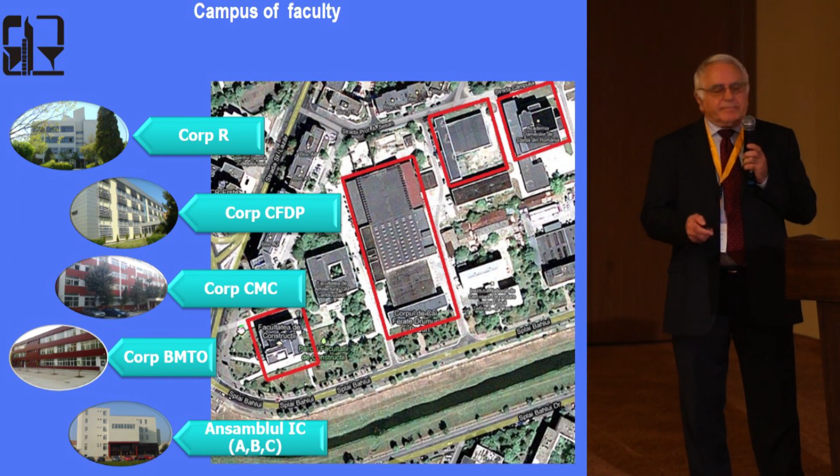It offers 4 undergraduate training programs and 10 Master of Science programs.

We have now 2,500 undergrad students, and you can see a quarter of these are master students, and then PhD students.

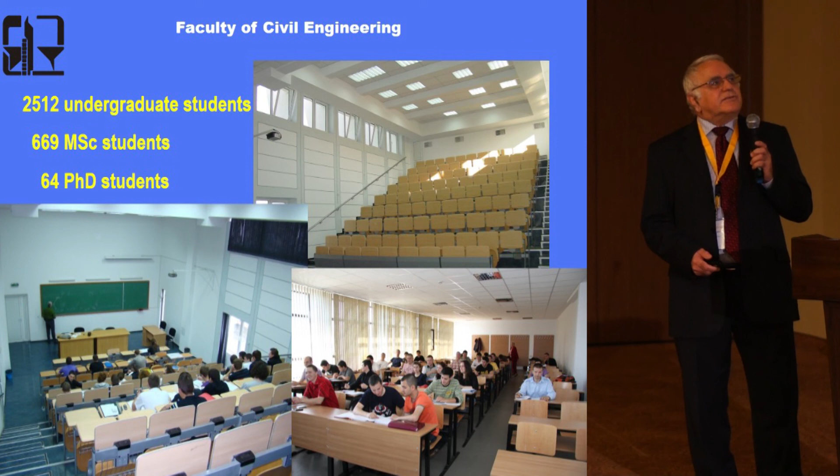To develop any program in civil engineering with good results in experimental work, we have developed a number of new laboratories or upgraded the existing ones.

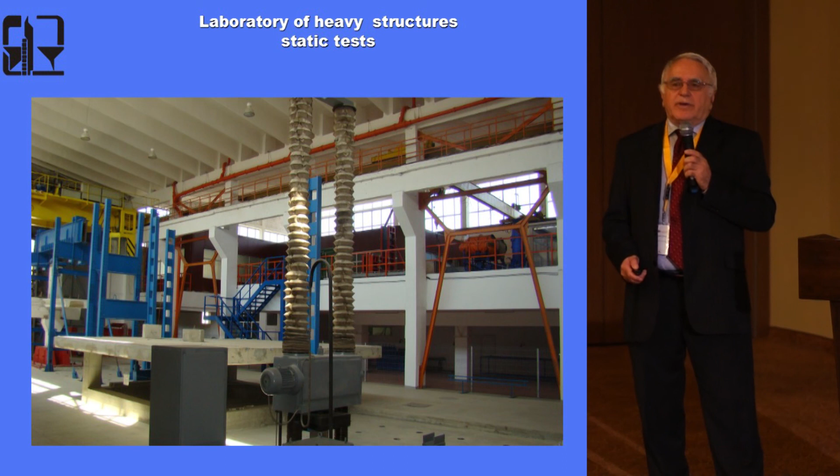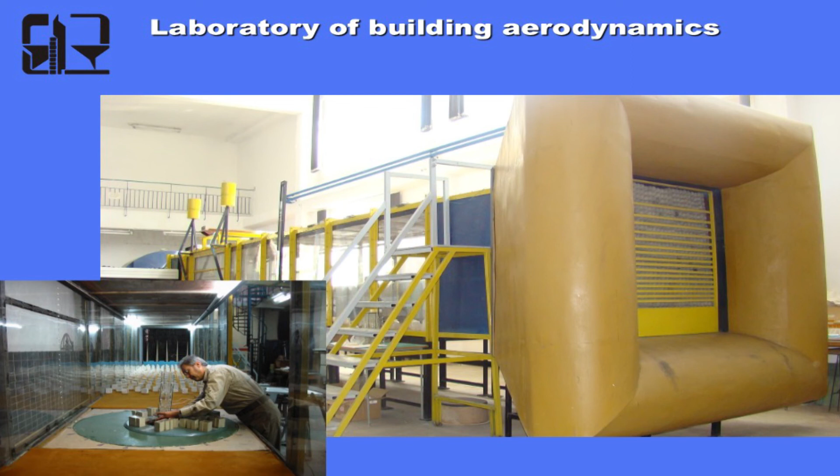There are some unique infrastructure pieces, such as an earthquake research station, an accelerating load station, and then a wind tunnel, and also a laboratory for composites and structural strengthening.

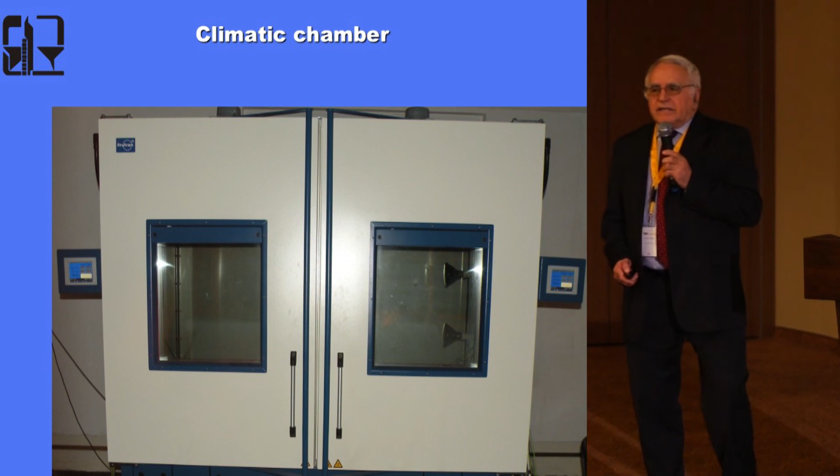We have added lately a climatic chamber to study the phenomenon of heat and mass transfer through the elements. The infrared thermography completes the existing infrastructure for research.

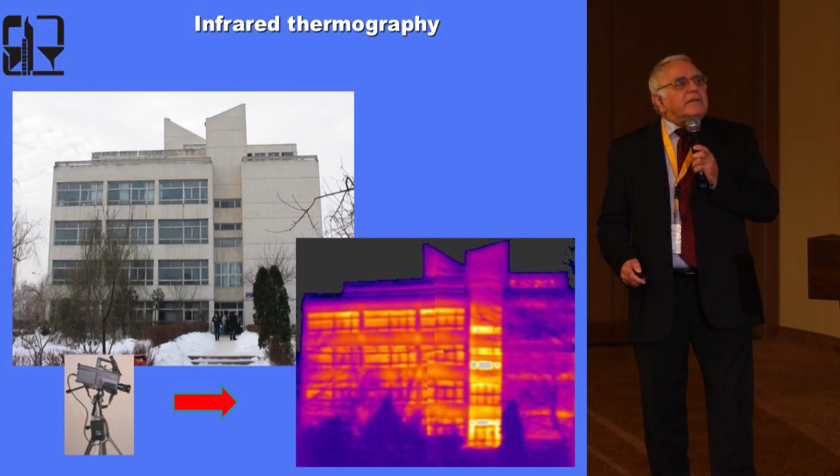The research area—and now, why composites in civil engineering? Why composites, since we have such good traditional materials as steel, concrete, timber, masonry, aluminum, or others like this?

Because there are some issues that cannot be solved solely by the simple materials that we are using.

Don't worry, there is still room enough for all other materials, because composites in civil engineering do not occupy more than 2.5% of the volume of production. 2.5%.

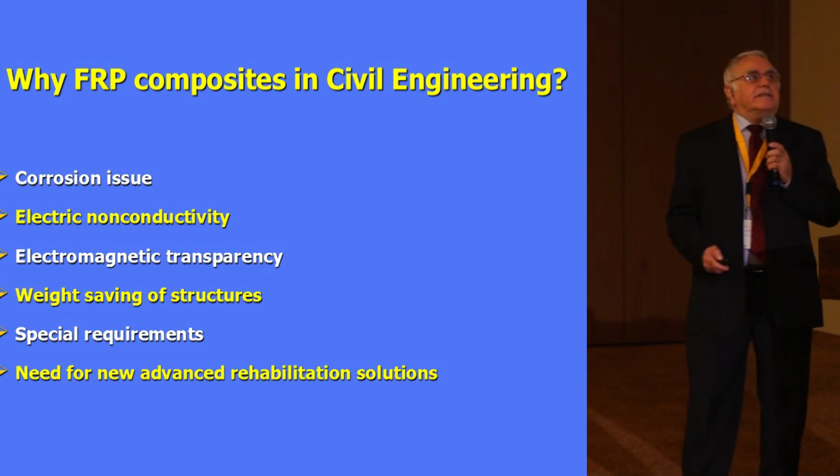Composites are materials or systems made of 2 or more phases separated by an interface, with properties that are better than any of the constituents provide working individually.

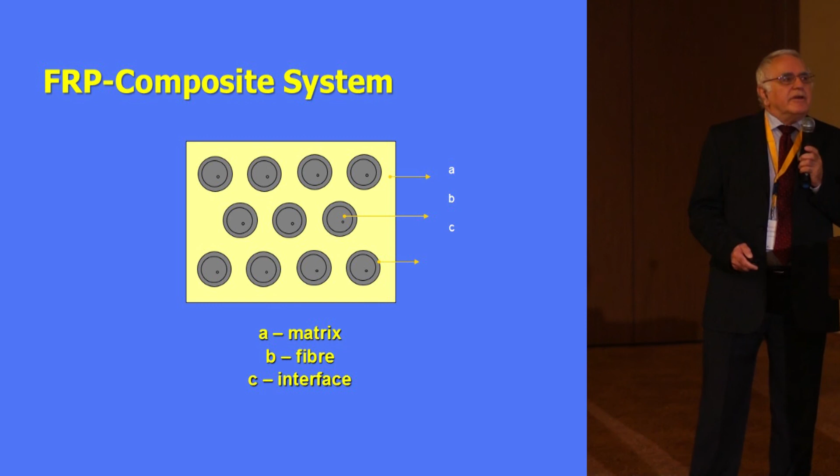A modern definition of composite materials provides that the fiber volume fraction, or reinforcing fraction, should be at least 10%, and the ratio of the properties should be at least 5.

The main characteristics and advantages that promoted composites are the lightweight and the controlled anisotropy.

Especially this controlled anisotropy gives us a lot of difficulty in teaching, because the students like the idea of controlled anisotropy, but they dislike the idea of using equations that characterize anisotropic materials.

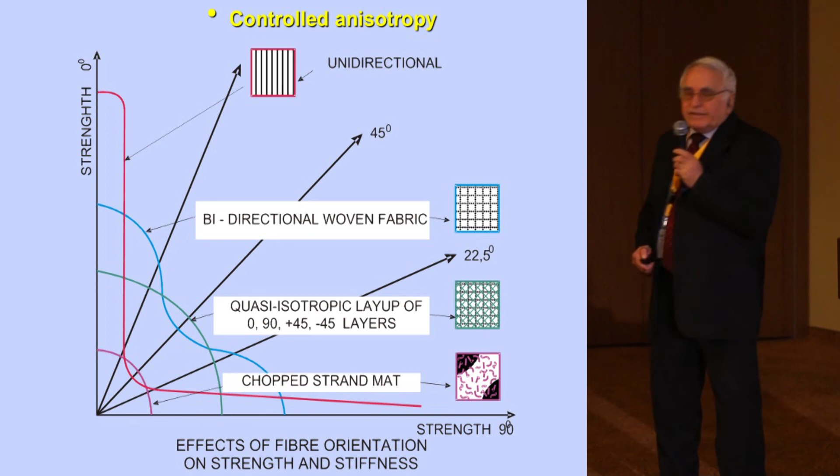Some achievements related to corrosion behavior and the very active involvement of reinforcing bars in bridge decks in Canada and the United States, where the use of salt for de-icing during severe times

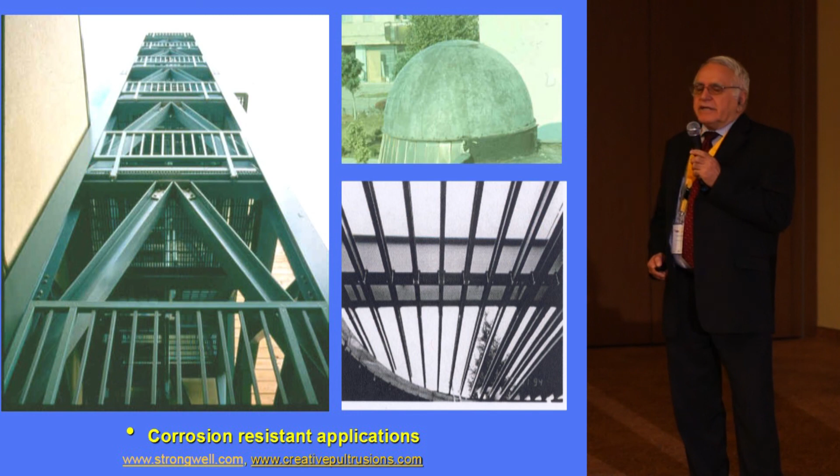promoted a very high rate of corrosion, and this has become a huge market for engineers in Canada and in the United States.

As a matter of fact, Canada is the country that has developed the best network of excellence for promoting composites. It's ISIS Canada, a project that was

involving about 40 million Canadian dollars, and many very good papers and design norms have been elaborated by that team.

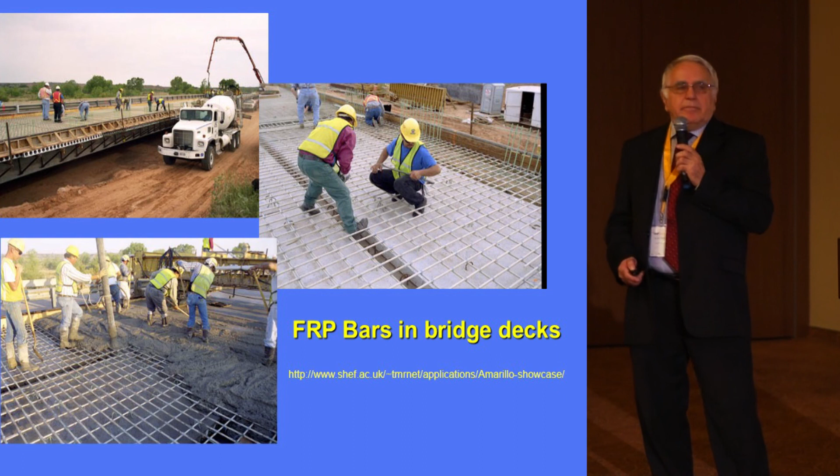The electrical non-conductivity and also the electromagnetic transparency are qualities that have imposed composites as a material of choice.

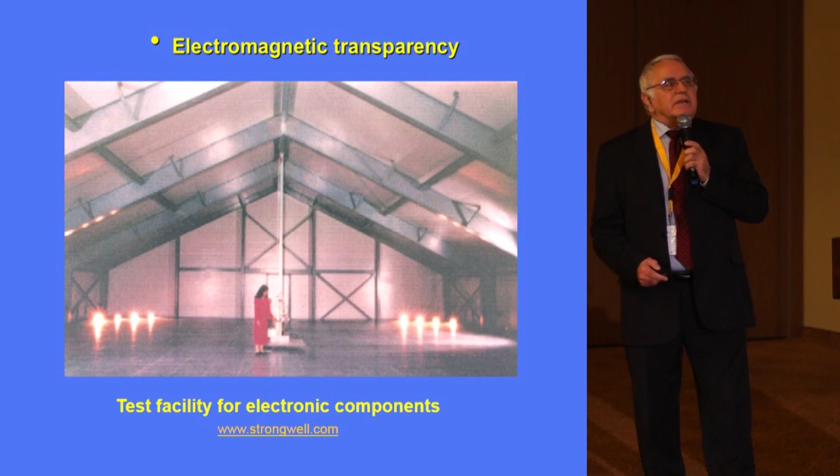I remember that in 1995, when I was in the United States as a Fulbright scholar, the American Broadcasting Company, who owned at that time the transmission rights for the Olympic Games in Atlanta, Georgia, 1996, had to construct

their headquarters on a bank in Atlanta, Georgia, and they chose to select pultruded shapes to construct the shelter for

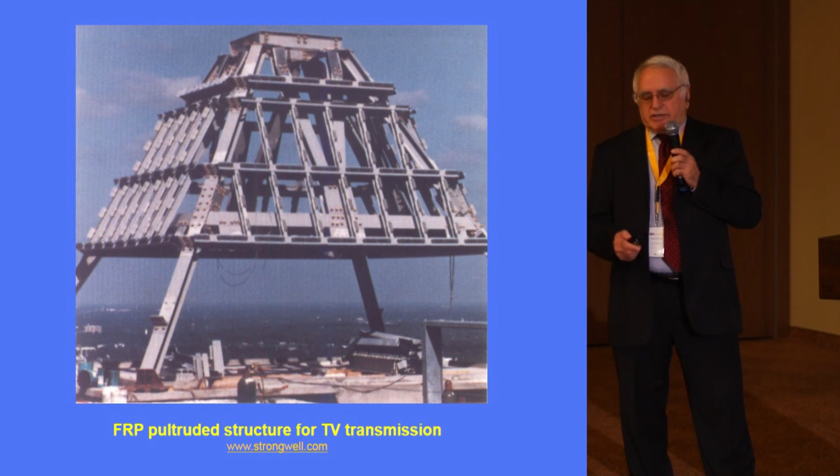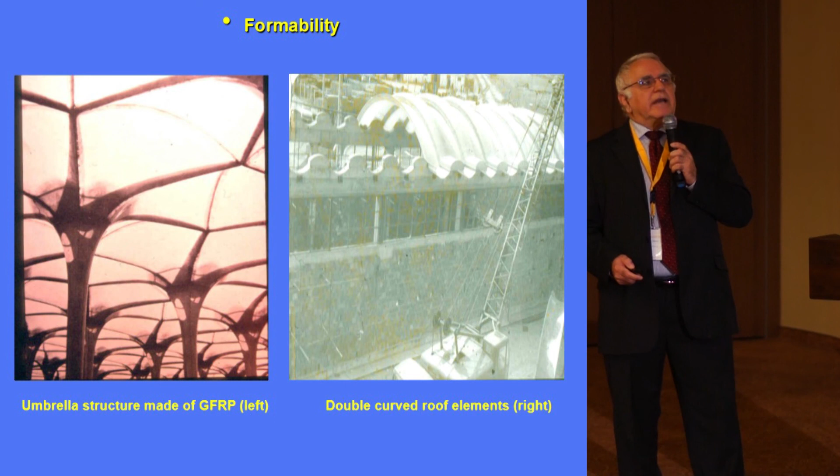of the United States in the Soviet Union, but on the right side is one of the good achievements of my faculty, of our team, in designing, constructing, and installing the double-curved shells.

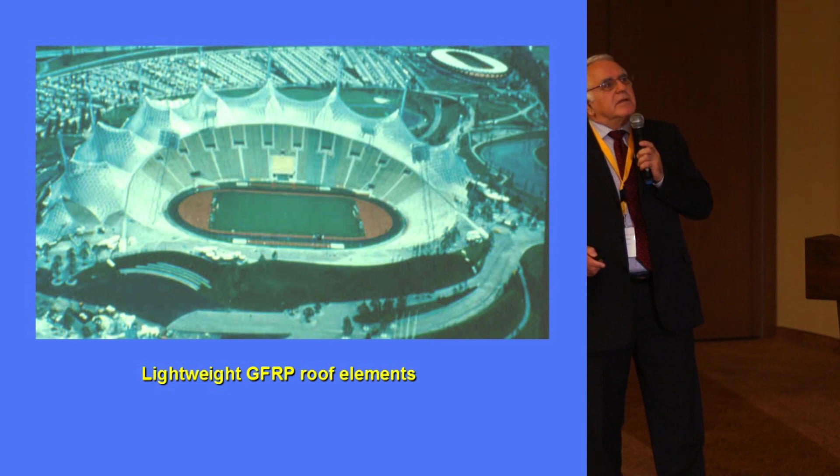This is what you remember, the Munich Stadium, and this is a composition of products which reminds me of a conference that I attended in

1972. It was the Second World Conference on Reinforced Plastics, and it was a hot debate between Christos Chamis, who was the head of the Division of Structures at NASA, and Professor Salmon from Wisconsin University, when a producer, Morrison Molded Fiberglass Corporation,

the producer of these shapes, discussed the efficiency of composite shapes.

And of course, the efficiency of composite shapes does not duplicate the shapes in steel. But the producer said it was a double shock for the users to have an entirely new material, an entirely

new element, an entirely new system of joining, and a new structure. That was too much for constructors to absorb at the same time.

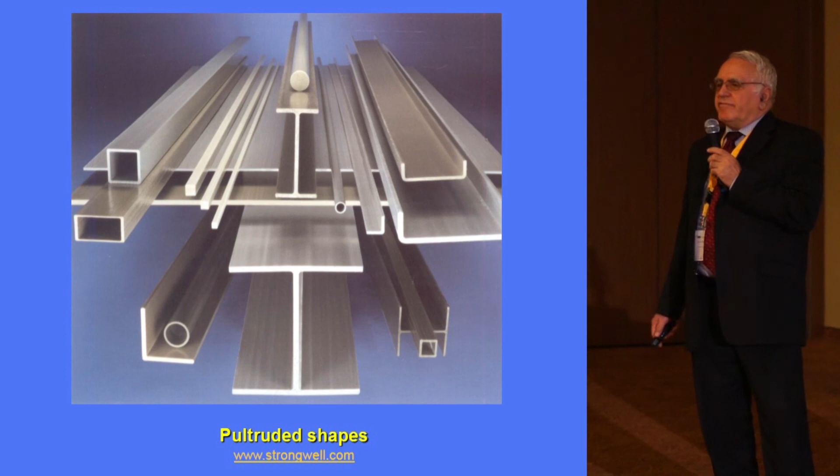So they decided to use the new material with somewhat lesser properties, but to keep the engineer familiar with the existing shapes in structural steel. I think it was a wise decision, because the market was declining at that time, and then it increased a lot.

The light transmission and translucency - on the left side is our own multi-folded skylight, and on the right is a control tower in New York.

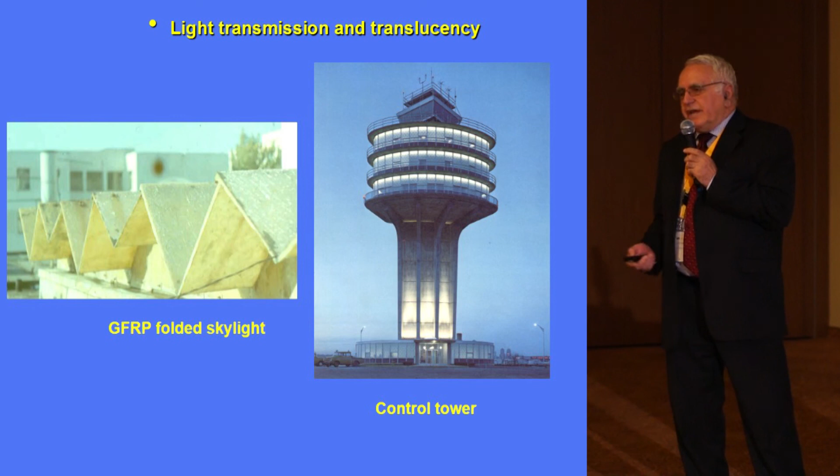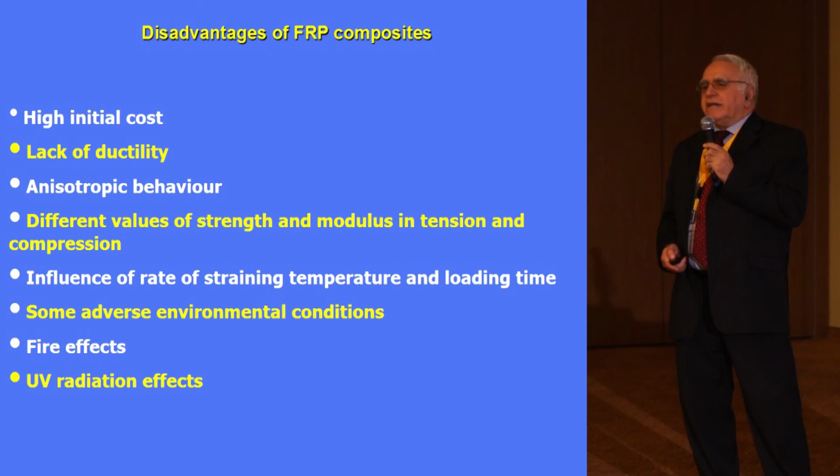Now you can see that if you are honest with any material, after praising it and exposing only the advantages, you have to be correct and have a critical evaluation. You have to keep in mind all the drawbacks or disadvantages that composites might have if you don't use them carefully. It is first a brittle material, and then there are a number of properties that we are not very familiar with.

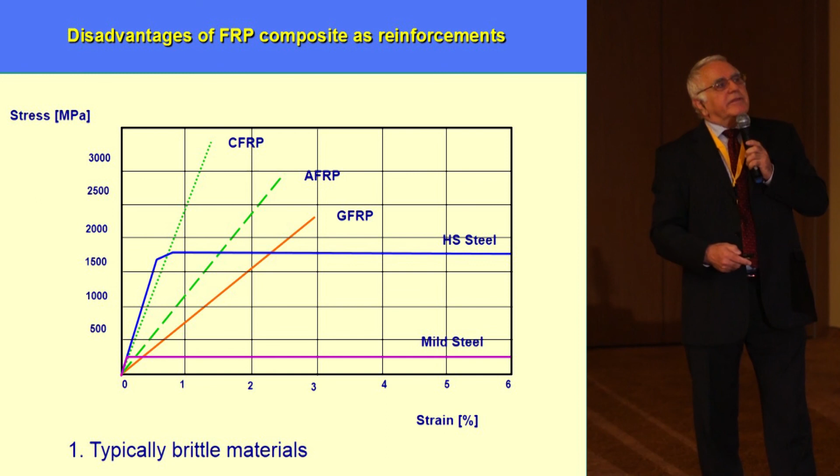The first European project we were involved in, related to new structures made of concrete reinforced with composite bars, required us to initiate the production of curved elements. We developed a spiral in our faculty that was produced for a few years by a company in the city of Iași.

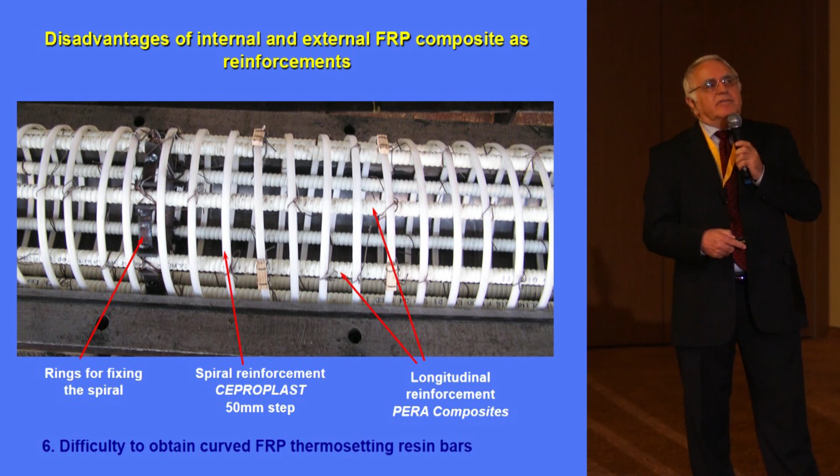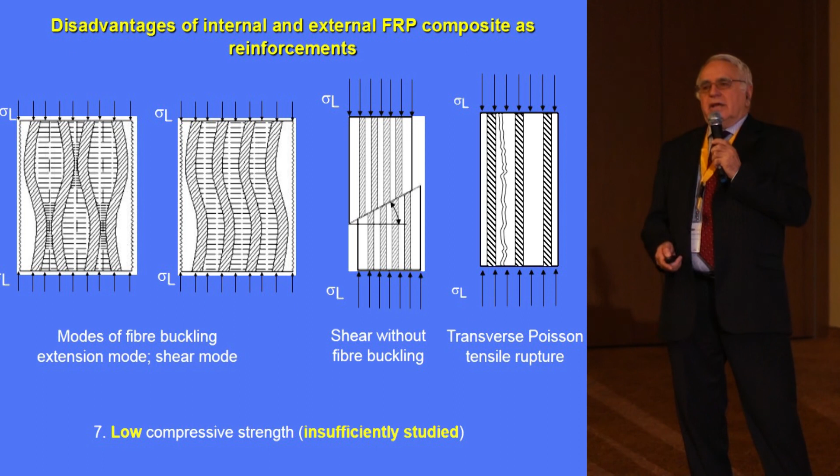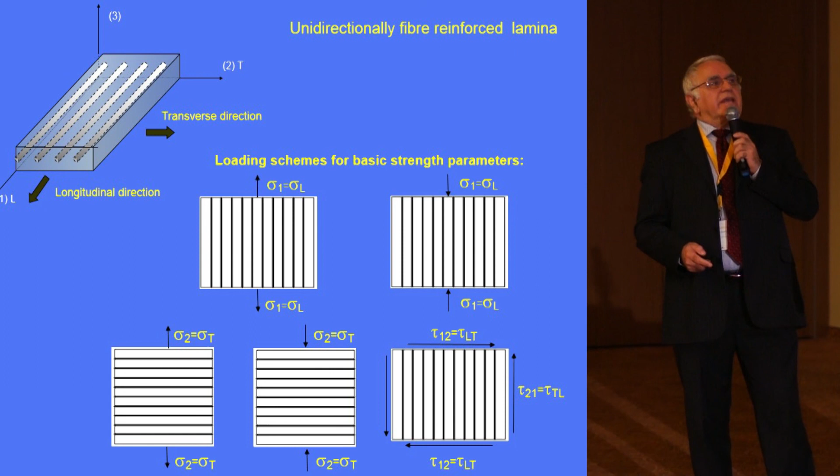There are many other difficulties in understanding composites. For instance, it's very complicated to determine how composites fail in compression. If we normally use 3 or 4 parameters to design structures made of isotropic materials, when we deal with composites we need at least 5 stiffness properties and at least 5 strength characteristics. Not to mention that the elastic modulus has a strange variation with orientation of load with respect to fiber reinforcement, and the thermal conductivity or thermal expansion is very different from what we are familiar with.

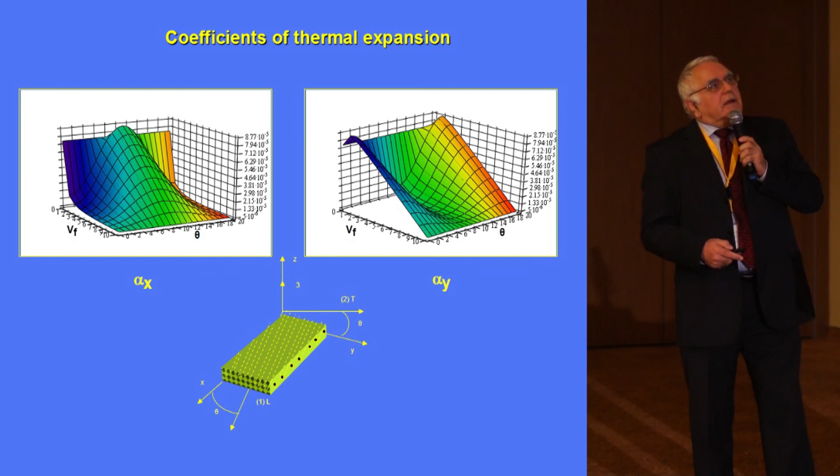Now, what happens to composites in my faculty? In a faculty in Romania - I'm going to say it in Romanian because it doesn't have a nice translation in English - it is said: "Spune-mi cum arată planul ca să zic cine e decanul."

It's about the curriculum in civil engineering, and since I became head of the Department of Civil Engineering, I was able to promote a special topic about composites in civil engineering. Until then it was not possible - everything was completely fixed: strength of materials, theory of elasticity, and structural analysis.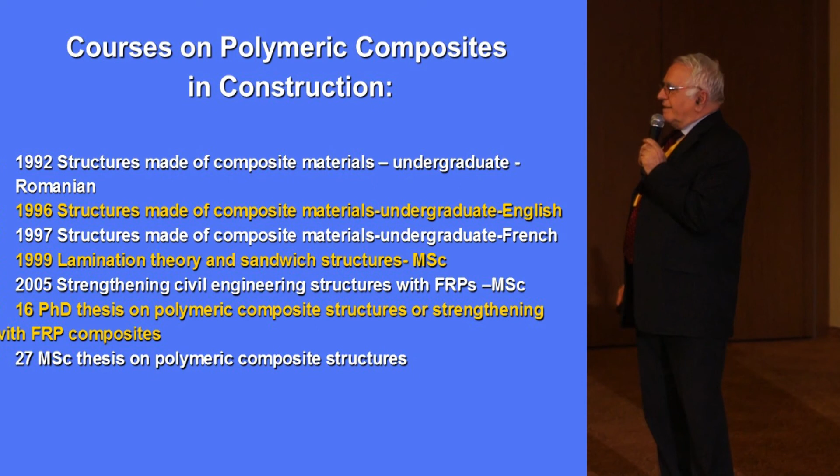These are the newest topics we are developing now in our courses, because there are 2 courses in composites. One is an undergraduate course, taught in the 2nd semester of the 4th year of study, and the other is given as a master course for students studying advanced techniques in structural strengthening.

In addition, we also deal with hybrid structures made of composite materials and traditional materials. The newest topic, which is a subject for the youngest PhD student under my supervision, is about life extension of civil engineering structures using composites. It also deals with life assessment, life cycle assessment, life cycle cost. And finally, a number of miscellaneous applications.

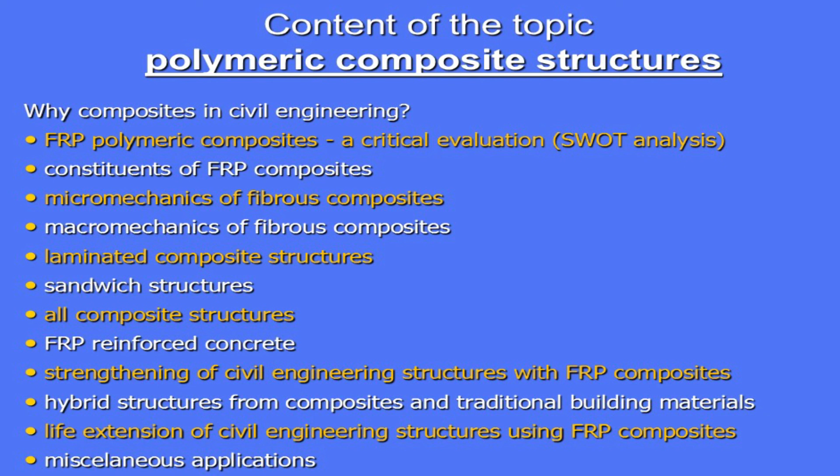Now I'm going to cover very quickly the main topics we developed in our faculty. Before 1990, the chemical industry of Romania had enough potential to develop at least one type of composite material: glass reinforced polyester. We had a polyester fabric in Bucharest, a fabric for fibers and for inhibitors and accelerators, and 2 major fabrics in Iași. So at the beginning we had to develop a number of multi-folded structures for skylights in the developing industry in the corrosive area around Iași.

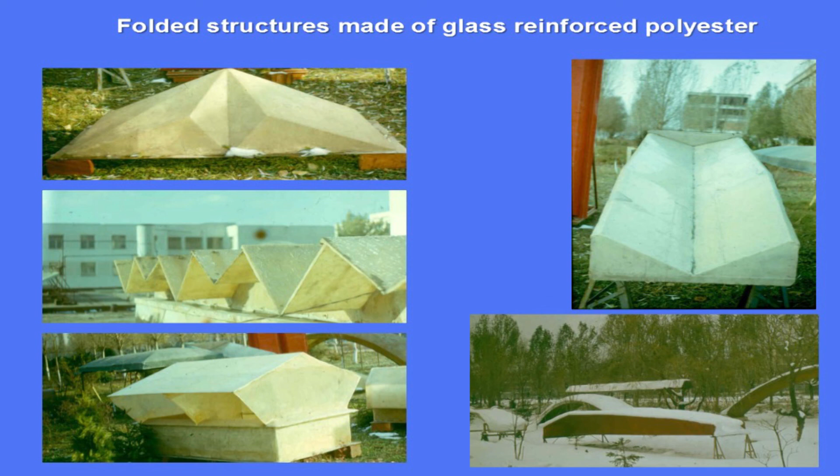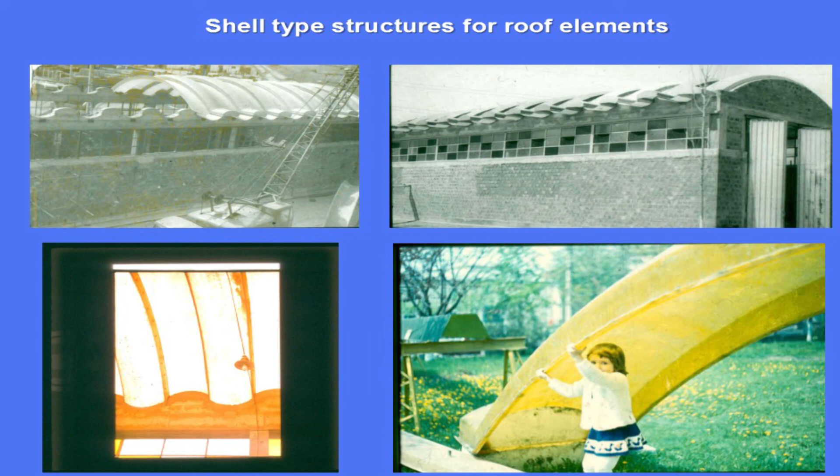Another very peculiar story happened in 1988, when the former President of Romania, Nicolae Ceaușescu, intended to visit the city of Focșani. Focșani is a very active area from a seismic point of view. The city hall had a special skylight which was supposed to be made of glass. We didn't have any other materials at the time, we didn't have any products from import, and the president was afraid an earthquake might happen while he visited that city hall. So the local authorities decided to replace the glass skylight with another one that wouldn't endanger the life of our distinguished guests. So we had 6 days to design, fabricate, and install a 100 square meter skylight.

You can see on the right, up and down, this skylight. We said, okay, we are going to construct the skylight, but when the visit finishes, take it out. It's still there, and it looks like that on the right side. But that's how history is written sometimes in the end.

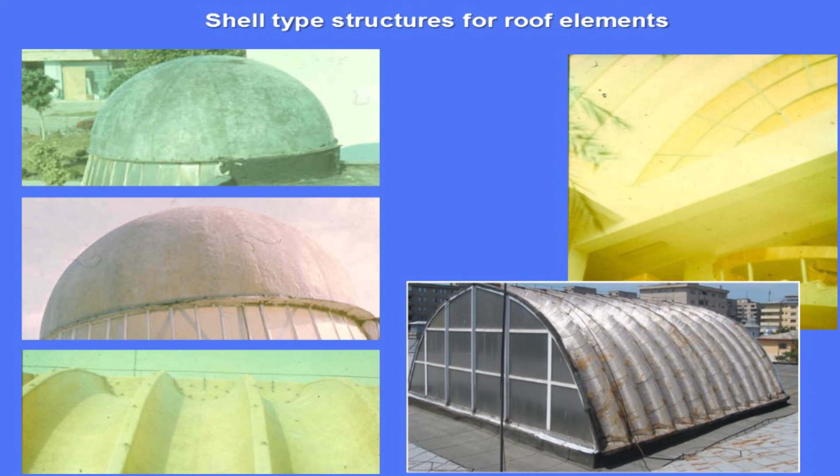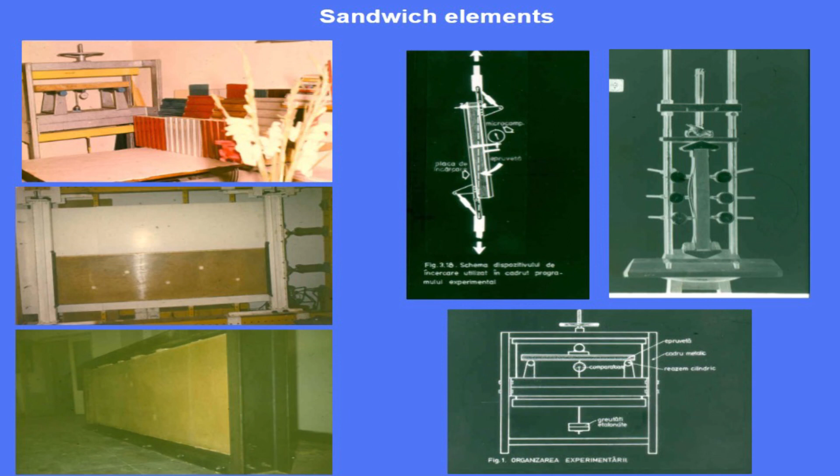Another topic that was started in my faculty was sandwich elements. It was the time when our company was expanded with works in different countries from the Middle East, and we had to coordinate the effort of a factory that was producing sandwich elements, Rompan 1, Rompan 2, that were exported at the time. It's part of my PhD thesis also, when I managed to have a number of patents for the testing.

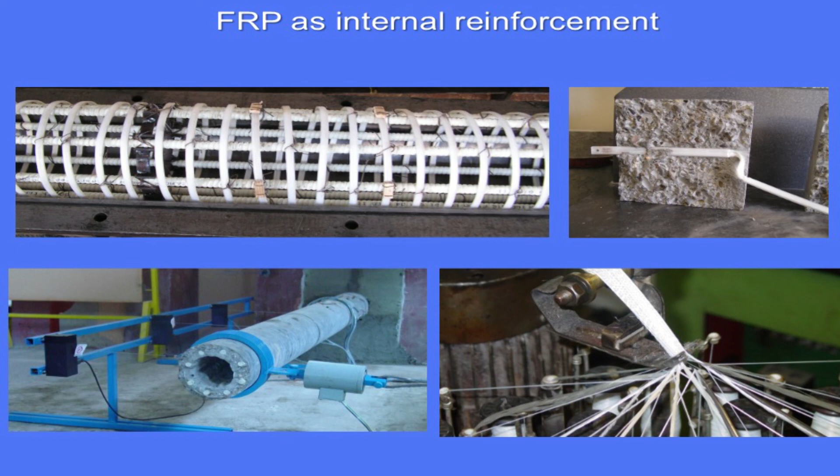In 2002, we were asked by some partners from Europe to develop this kind of bent elements to reinforce the columns for power transmission lines. This product was developed by Seproplast, a research center in Iași, and then it was produced for a short time, and then was sold for, I would say, funny reasons.

A number of research projects have been dedicated to properties, but then the strengthening techniques came, and we have been involved from the very beginning, along with our colleagues from the University of Sheffield, where we have a good exchange teaching and research program.

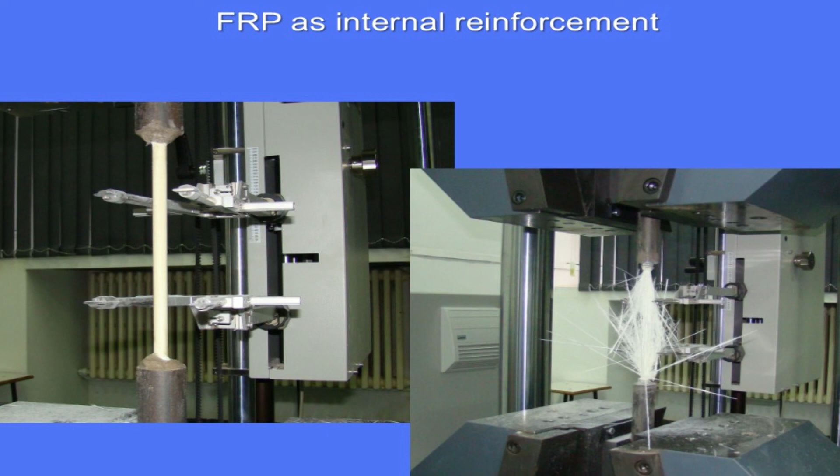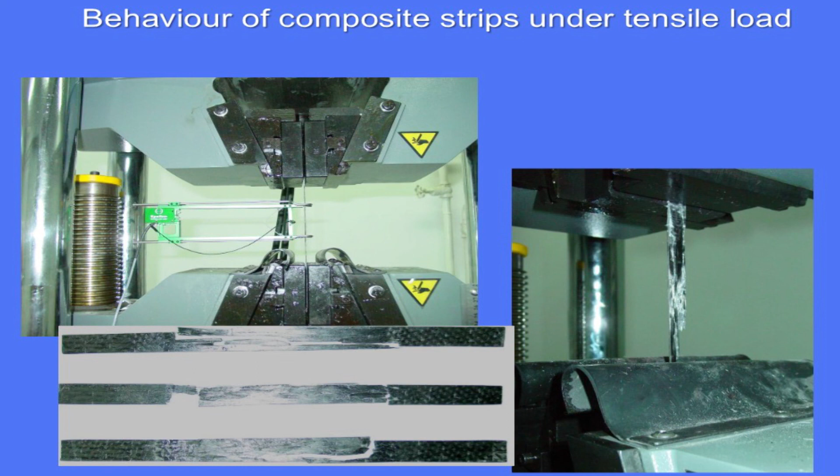We extended our research with plate strengthening, and a very recent PhD thesis was dealing with it.

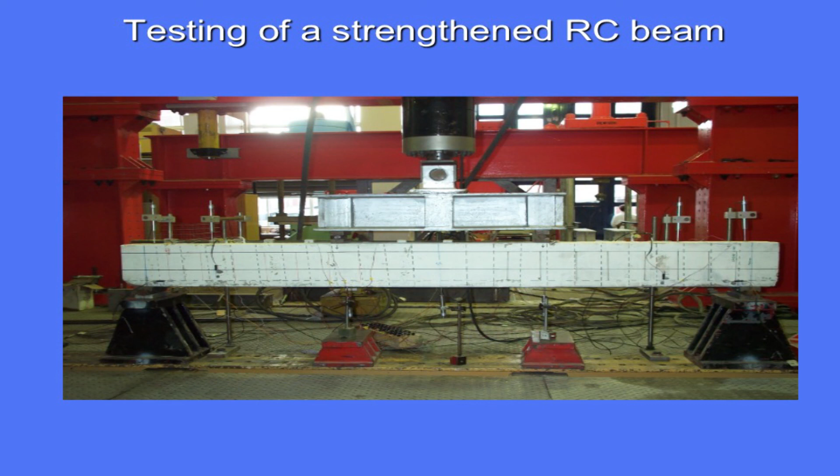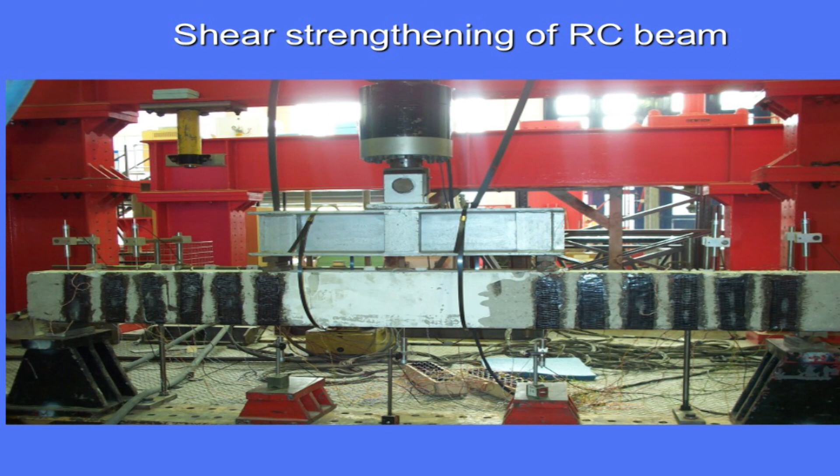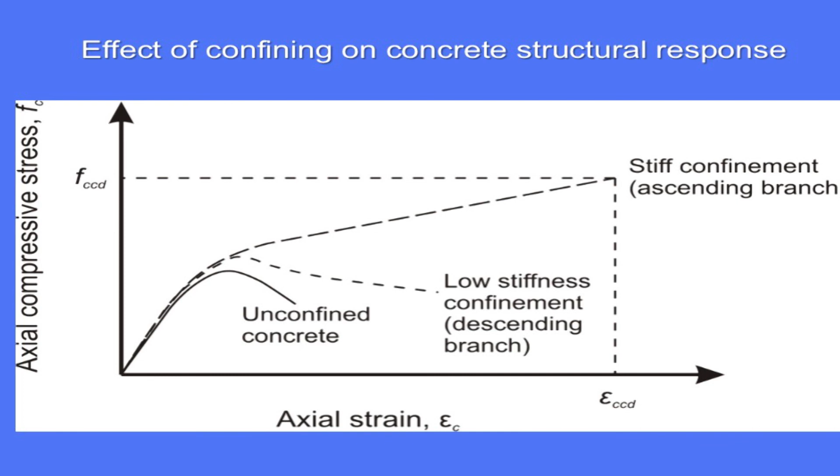And then we went to confining. What's the difference in philosophy of strengthening? In case of beams, we want to supplement the reinforcing bars already existing that have eventually been damaged by corrosion, while in confining, we want the concrete to work better. You can see that the stress-strain curve in case of confined concrete improves a lot.

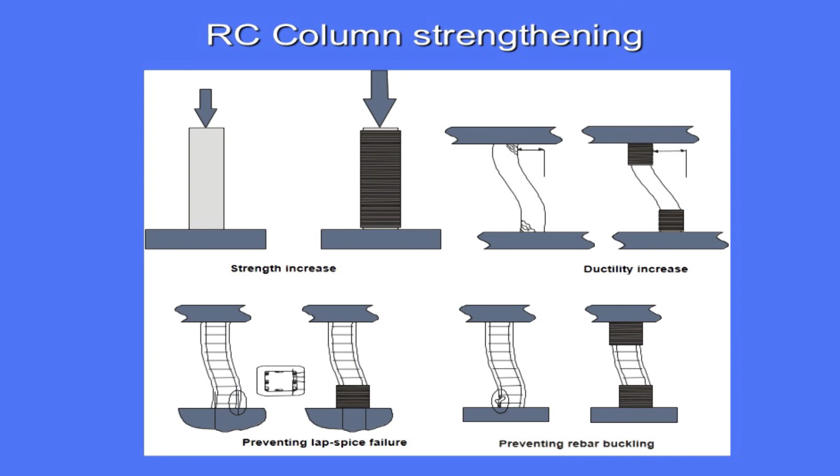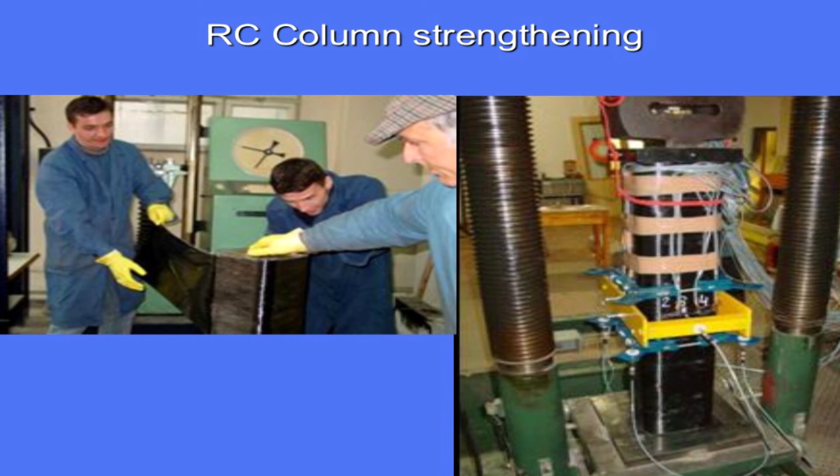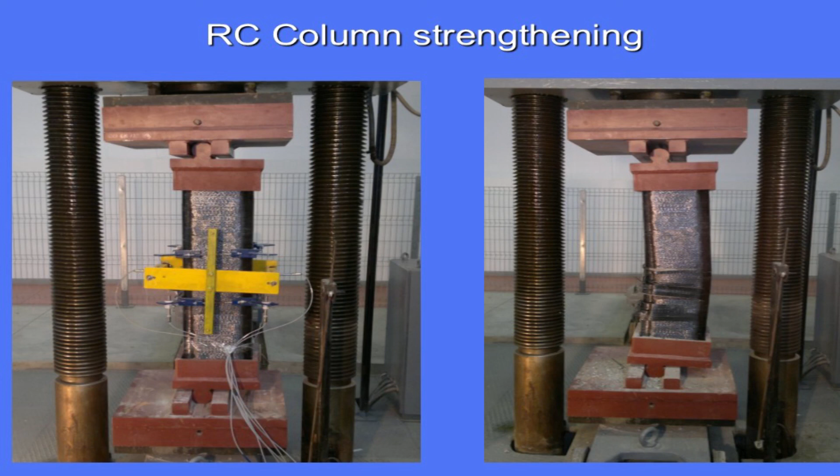The effect of column strengthening by confining, a number of 3 PhD theses have been dedicated to this subject, with circular columns, square columns loaded axially and loaded eccentrically, until we defined the interaction formula.

Another topic was bonding CFRP to concrete. We were part, with Professor Balázs, of a European network, Marie Curie Research Training Network, and one of the goals was to develop a round-robin test, meaning tests in different laboratories on the same topic. We have been involved in this with Sheffield and other partners, from 11 countries in Europe.

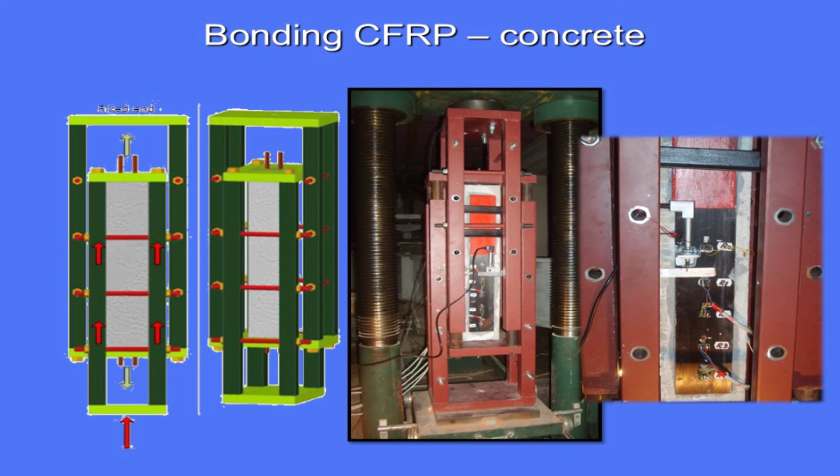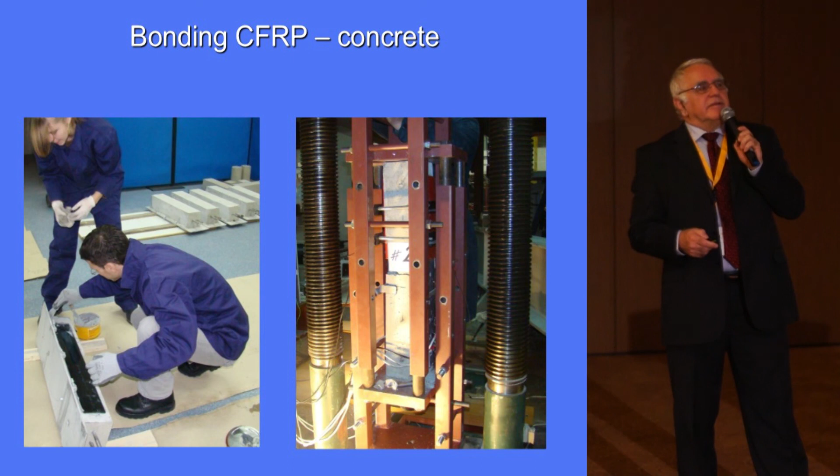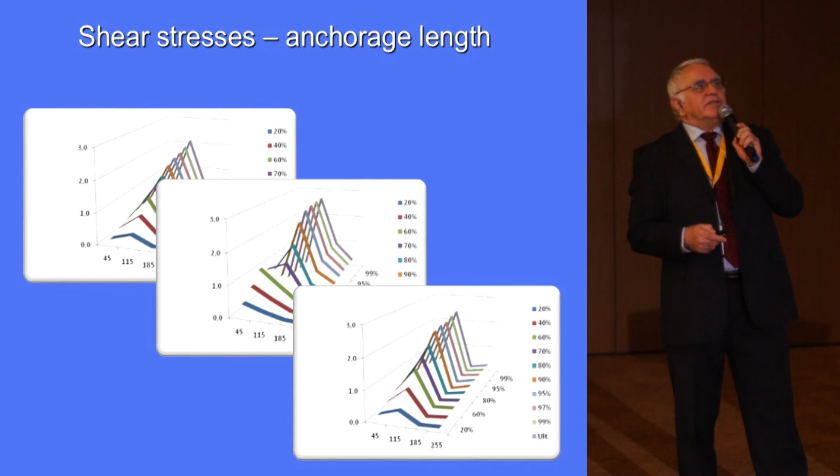Part of the technology - the young lady in the corner was the PhD student for the topic - and here are some details of the failure, and finally the shear stress anchorage length diagrams.

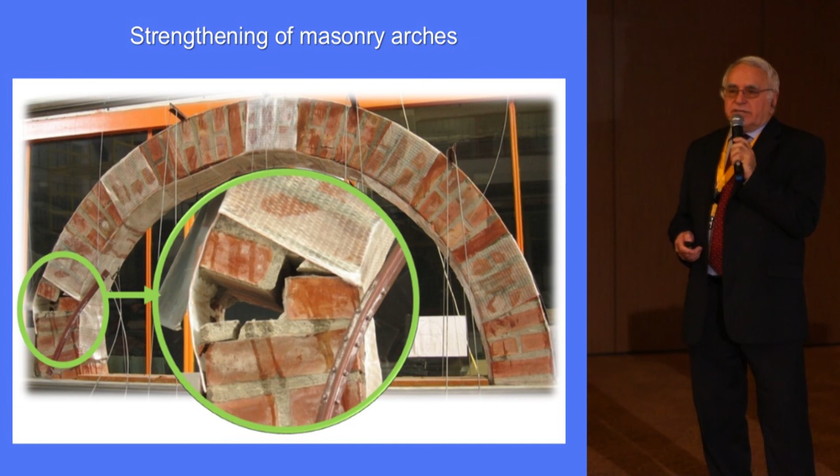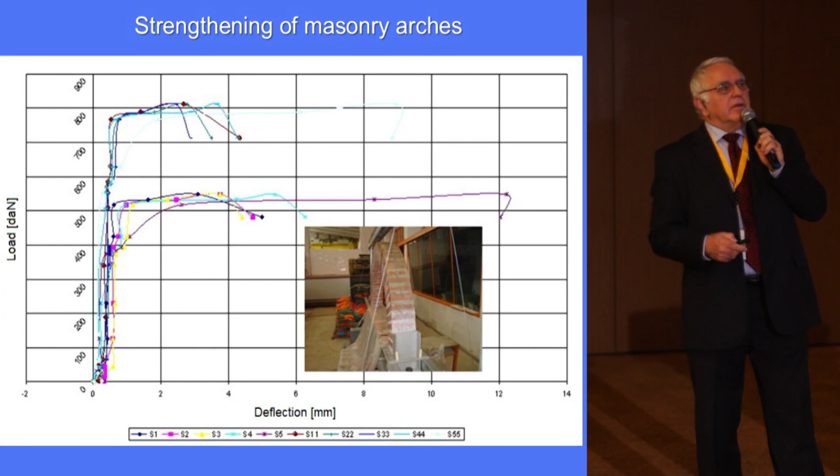Then another of my colleagues decided to work on strengthening masonry arches and masonry walls. It was related to traditional architecture in northern Moldavia, which we believed we could help with. Here is the masonry vault loaded on the platform, and finally you can see the failure of that important structural member for traditional Moldavian architecture.

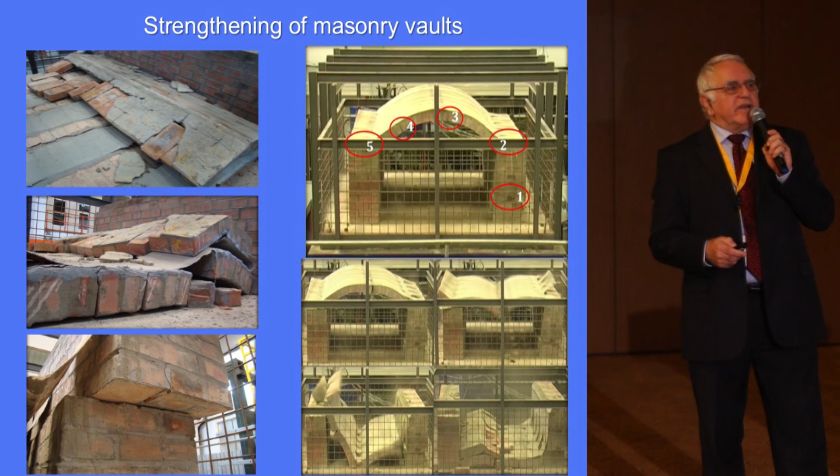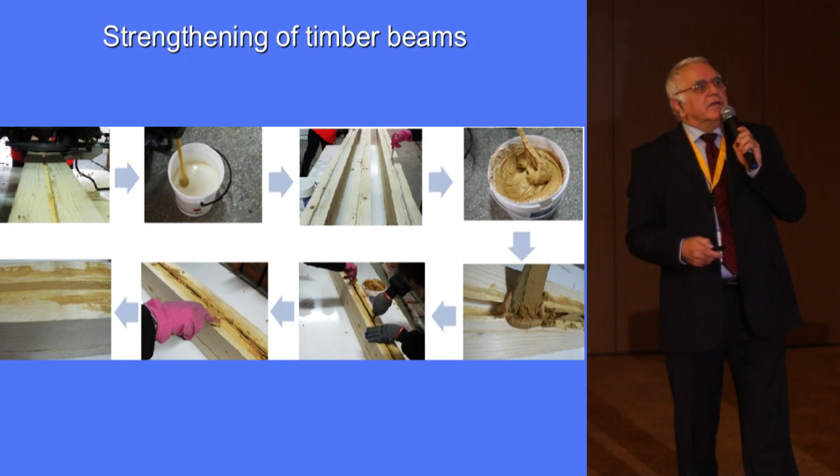The strengthening of timber beams has been the topic of another PhD thesis. Here are some solutions, the technology, and the effect of strengthening. Then a German guy came from Constance and he wanted to study the effect of strengthening the ends against shear failure.

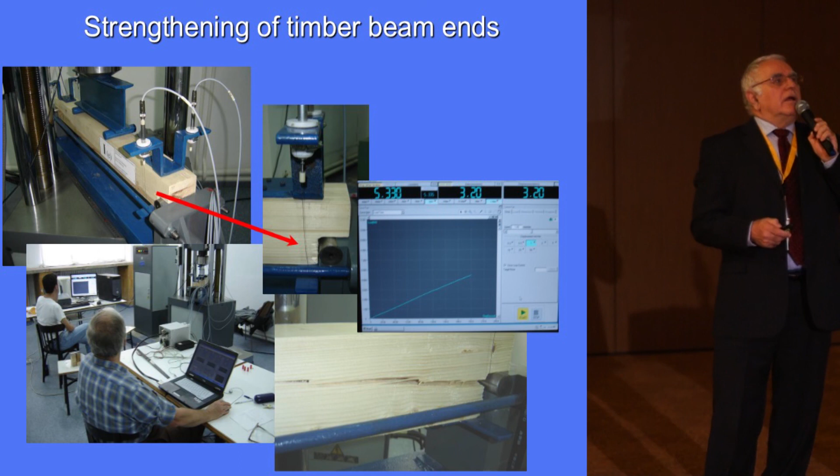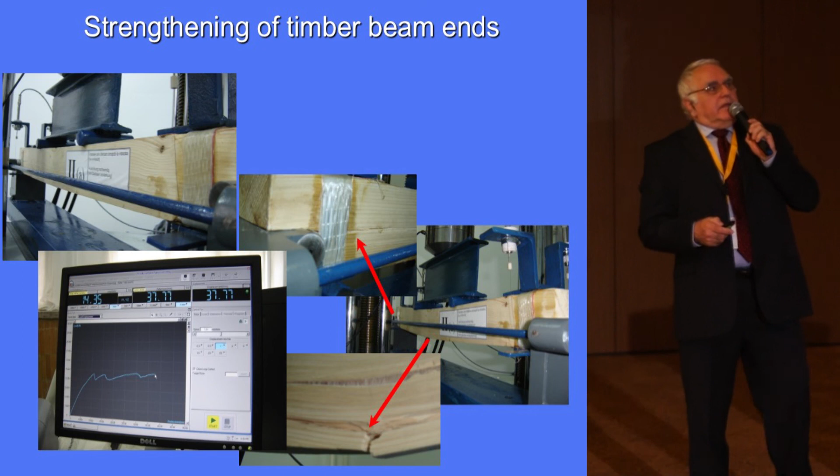We decided to extend the polymeric matrix to mineral matrices, and Professor Cosmin was member of the defense committee that evaluated that thesis about 1 week ago. The mineral matrices were intended not only to attract new materials, but also to introduce the idea of ecological materials.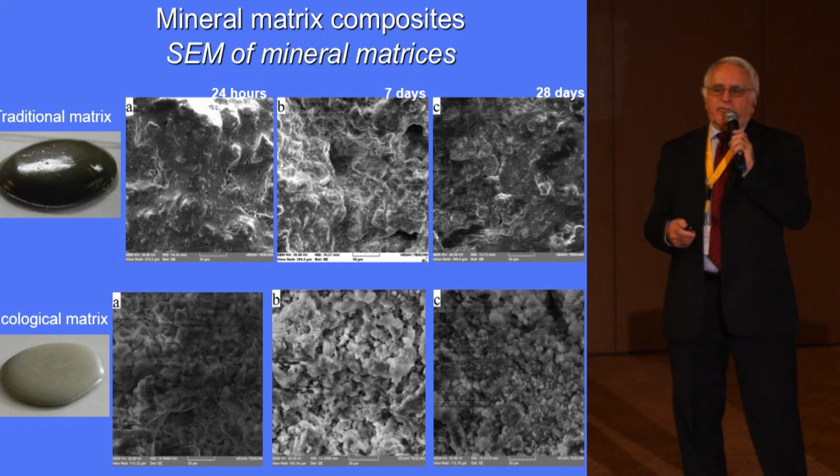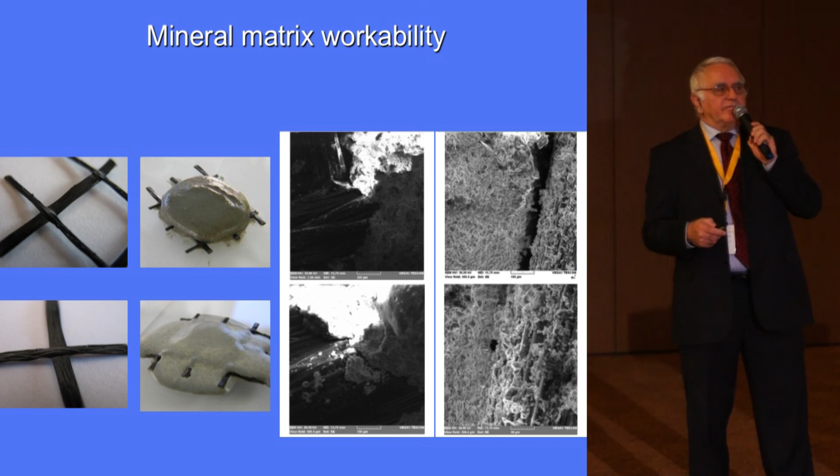Also the interface with fibers, the penetration of this type of mortars, results of elements made of these materials, and the modification of existing calculation formulas for multi-layered composite structures.

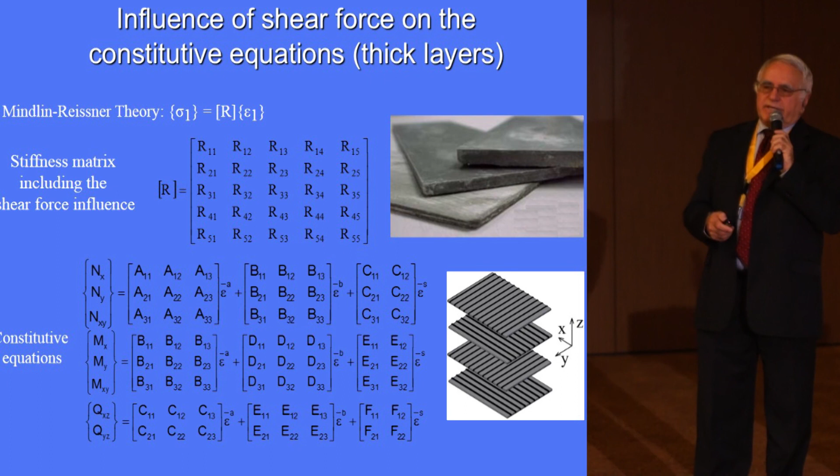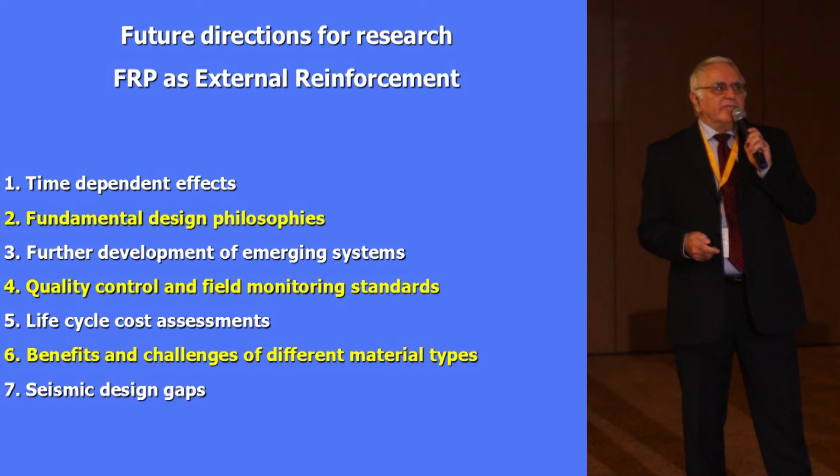Finally, these are our ideas about future research, coordinated with our friends from a new project submitted to the European Union. It's a COST project, involving 17 European countries and 8 non-European countries, from the United States, Australia, and Asia, that seem interested in developing this subject.

Now, this is a review of what we have done in composites since the very beginning, 1968, when we made the first composite elements. Okay, and finally, this is the real conclusion.